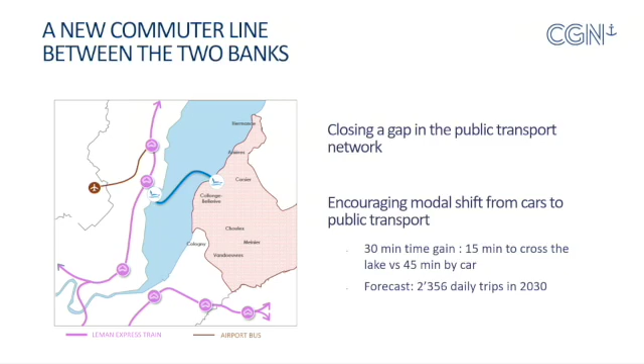So between the highway and the waterway, we want to convince people that they should choose the waterway because it's quicker and it's going to be more energy efficient as well. So you have some trips between this region here and this region here, where, for example, one of the largest private banks in Geneva is building a new headquarters, that are going to be 30 minutes shorter using boats as a means of transportation compared with using your car or the train all around the lake.

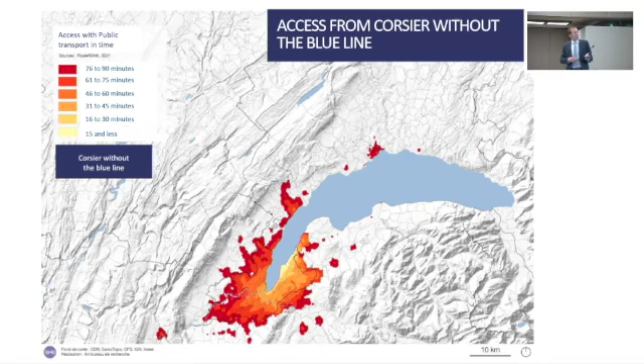So this is just to exemplify what I just said. Here is where the line would start. As you can see, we would expand the perspective, the places you can reach within the same time, significantly on this side of the lake, which is the side where a lot of economic activity is situated as well. So there is tremendous potential for people that have been using their cars every day to commute to work to shift to a public transportation means, which would be, in that case, the boat.

Why is it about decarbonization, you might ask? Because as I will explain afterwards, we will be using first traditional boats, so diesel-powered. It is, first of all, a carbon-free project in the end, because we are meaning it seriously when we say it's a zero-car project. There is no car access to the terminals. There is, of course, no car transport on the boats themselves. It's only accessible with a bike, on foot, or by public transport.

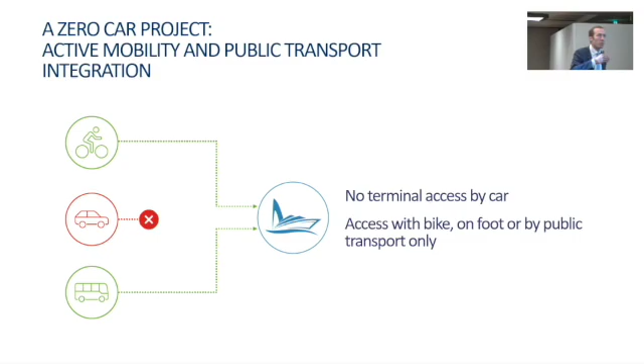So we are trying also there to not only act on our part of the transportation chain, but also to make people use public transportation or active mobility, sustainable mobility means, from the very beginning of the trip until the very end. And as we know in public mobility, this is decisive. Once people get into their car, they will never get out until they are at destination. But if you can prevent them from getting into the car and offer a better alternative, then it's going to be possible to bring them with public transportation or active mobility up to the destination.

With the boat, we also have a competitive advantage over trains and buses, for example, which is real estate on board is more accessible. It's easier to create large spaces, for example, for taking the bike on the boat, for taking the electrical scooter on the boat. You might have heard, all around the world, bus, train, streetcar companies are struggling with the questions of, can you allow people to take their bags with them? Can you allow every scooter to get on board with the passengers? It's very hard. It's a lot less hard on a boat where you have space, so you can create this chain of mobility. You use your bike, get on the boat, use your bike again, and you've been carbon free, or at least you've reduced your emissions all the way.

So we're taking here a two-step approach, and this is a full disclosure. We're not going carbon-free from the beginning because we can't. The capital expenditure would be too high. We are a publicly funded company, and it's sad, but it's true that today it's still kind of hard to convince public authorities that they have to come up with the capital expenditure up front before they can see the benefits. So we are trying to do decarbonation in that we are convincing people to switch from highway to waterway, and this is good because public transportation, even though the boat is diesel powered, is better than everyone being alone in his or her car. But of course, we know that in the second step we have to decarbonize the propulsion as well.

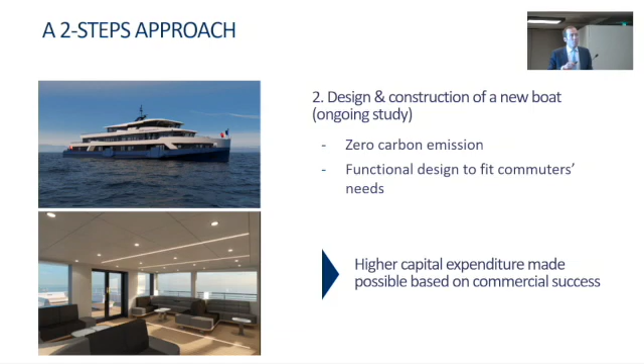So the second step would be clearly the design and construction of a new boat. That's why we are a proud partner of this conference here. We are sure there is a huge potential in public transportation on waterways, decarbonization too. And of course, we have kind of specific needs. It's very different from large shipping boats. It's very different from privately owned leisure boats. But we are certain that this higher capital expenditure will be made possible if we reach commercial success. It doesn't mean that we will be able to fund it all from the market, but we will unlock some of the possibilities to have external funding, because we will have proven that there is demand.

So we are trying to harvest something like a threefold potential in decarbonization, which is the big thing we are all talking about today. The first thing is demonstrating the potential of waterway commuting is a good thing, because we are encouraging through this public bodies and private actors to at least consider capital expenditure and opening new lines in this field. And this is always good, even though the boat isn't fully zero emission powered at the beginning, because you are gaining efficiency if you drive people away from the car into any kind of public mass transit.

So we are also working to increase the modal share of public transportation as a whole, because people will get on our boat with the bus, with the train. They will take the train on that side of the lake. The station is only a few meters away from where the boats will arrive.

So we want to offer something like a seamless and integrated experience. Taking the boat should not be something special. It should be integrated into your journey to work or back. And then we are also trying to encourage active mobility. We have special assets in this field, as I said before.

Bike transportation, scooter transportation is a very hard problem for most mass transit systems. It's not for us, because we can build boats with enough room to take the bike and the scooter with you. And this is very good to foster the potential of what's now called among experts active mobility, which is any kind of mobility assisted or not by an electrical engine, where you have to be active physically. So this is walking, of course, but also riding a bike or using your scooter.

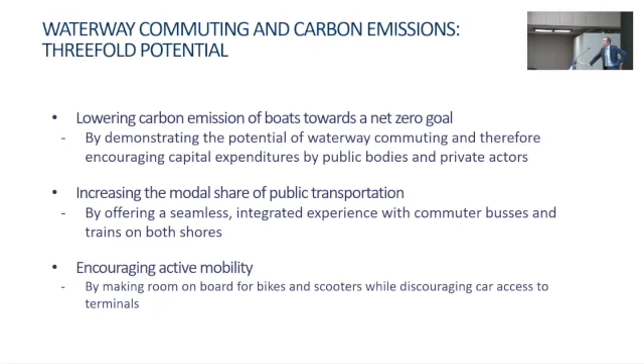So, okay, I hope you see that there is a lot to be seen and a lot of new markets to be opened, actually, that we then will have to decarbonize, so to speak. We are very proud to be a partner of this conference. For this reason, we are a very small player in this field, but would be very happy to foster innovation in Switzerland too. And that's maybe my last point.

Projects like this also help to open the horizon here in Switzerland, which is not a maritime country, which is not turned spontaneously towards the sea and shipping, at least not in the greater public. It's opening new fields of technological innovation that have made the success of Switzerland before to new propulsion systems on water. So I hope this has been enjoyable for you all.

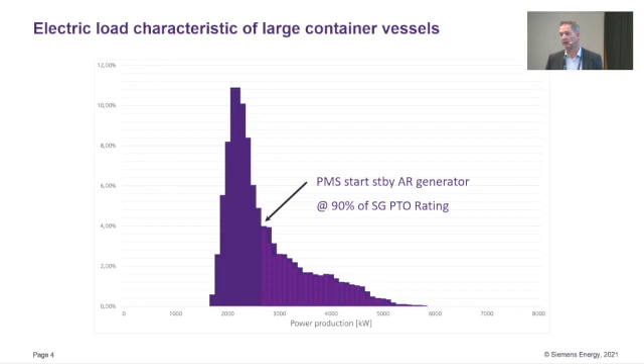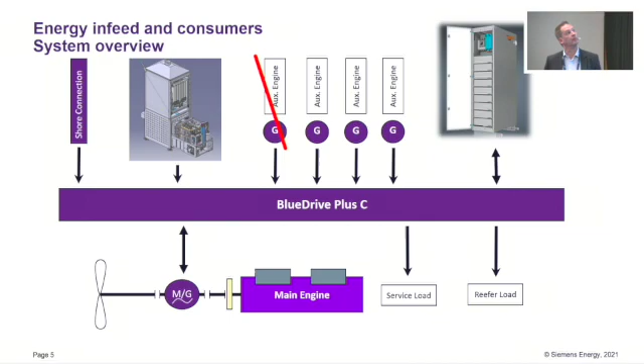Here in this case, you have your shaft generator driven by the two-stroke engine in so-called PTI/PTO, power take off, power take in. So you run it as a motor or generator. In motor mode, you can apply additional torque to the shaft line, and in generator mode, you feed your electric system. Shore connection is also quite easy to adapt to this solution. You are also frequency independent, so you can adapt to 50 or 60 hertz networks in the harbor. And alternatively, we now have the fuel cell solution also included in this system concept, which I'm coming to later.

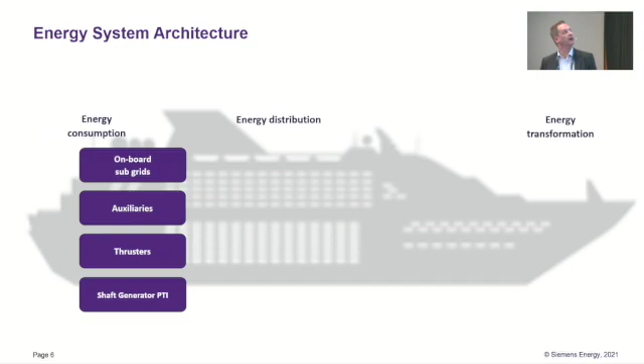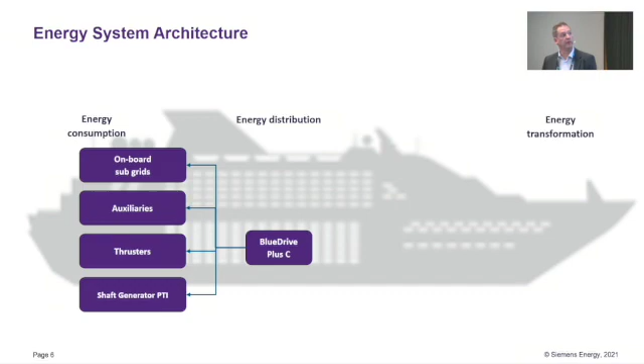So this is just showing an overview of the different consumers again. You have your subgrids, auxiliary supply, thruster, and shaft generator, PTI. The distribution network, Blue Drive Plus C, that's the energy distribution. Your energy sources will be variable speed gensets and the shaft generator, PTO, and you are able to connect batteries to this system, and alternatively also fuel cells. And the fuels are also discussed today. Here it's shown ammonia, LOHC, which is one fuel discussed for small ferries, and pure H2 as a fuel.

Of course for ammonia and LOHC, you have your reforming in between to operate these fuel cells, but the advantage is ammonia and methanol can be used for two-stroke engines and are on board already, so this fuel can also be used for emission-free operation in harbors using the fuel cell technology, adapted to the electric supply system.

So everything will be controlled by our energy management system and EcoMAIN Suite, all these energy delivering components like diesel engines, batteries, and fuel cells. The batteries' charging and discharging cycles will be controlled to operate them in the most efficient areas. Fuel cells, with partial load, operate at a better efficiency point. And in addition, your variable speed generators, depending on the load, work at different RPMs.

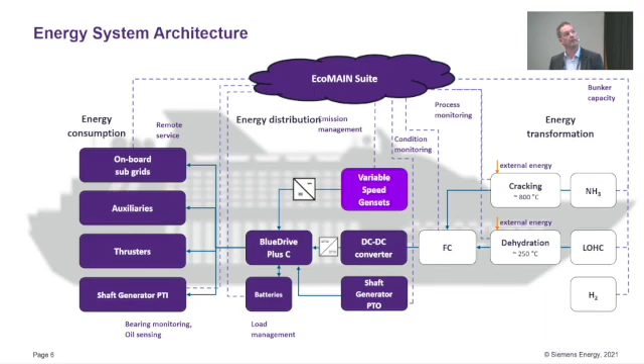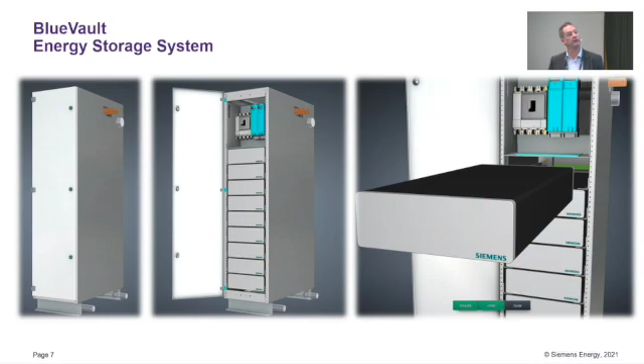And so we have about 40 references now for this system being integrated in this Blue Drive Plus C concept, mostly for ferries. The largest installation we have is 5 megawatts, and so this is already quite accepted in the market.

So one cabinet will be 200 kilowatt supply, and all the auxiliaries will be handled within the system, so air cleaning and some compressors for the hydrogen, so that can be then adapted to the electric network.

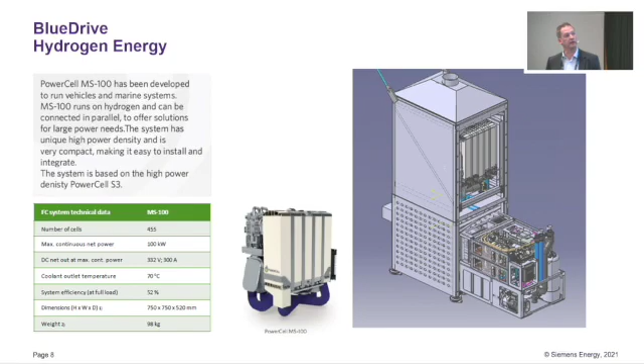So coming now, just an overview of the fuels which are discussed for the fuel cells at the moment. Compressed hydrogen: I'm involved in a project to decarbonize the shipping of the Rhine area in Germany. So there, compressed hydrogen is the preferred fuel. They're talking about containerized solutions to bring this on board. It's a concept which is discussed at the moment.

Liquid hydrogen, we are talking also to MAN Cryo in this sense. They have tanks available for a fixed installation on board. So that is also a possibility there. LOHC can be stored in your normal bunker tanks. There are no requirements. And methanol and ammonia. For methanol, the tank structure can also be used on your ships. So this is, I think, the advantage of these fuels.

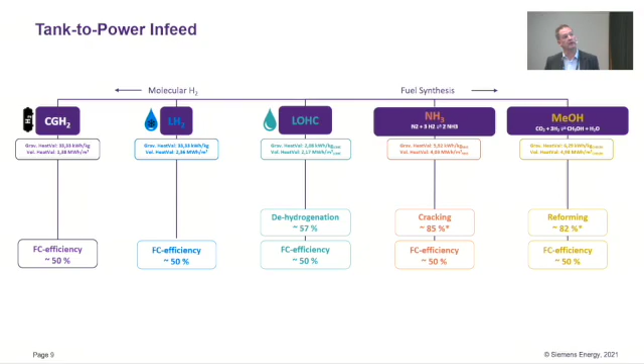So the fuel cell efficiency is shown here at about 50%. But then for the synthetic fuels, you have also the reforming process here, which of course takes some efficiency off. As discussed also today, the first ships will operate on methanol in the future. So there would be an option also to use fuel cells for emission-free operation of container ships in the future in a harbor area or emission-free areas.

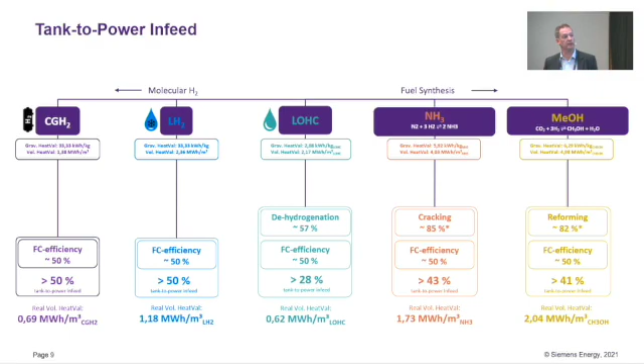So this is showing the energy density again. What we do also with the customer is having a look at the CAPEX and OPEX. The present situation, I must admit, is a bit difficult. But I think as soon as this is widely used in the market, of course the price will come down.

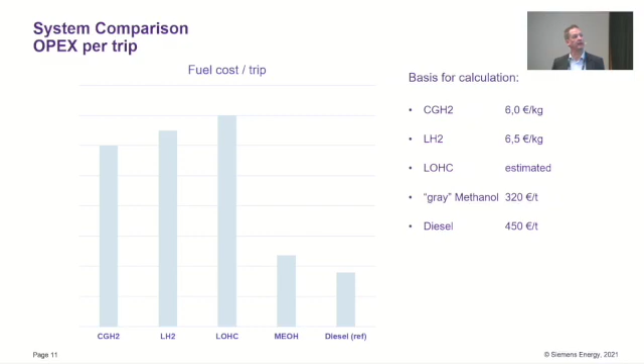And the OPEX, I think there will be significant changes in the future. So at the moment, using synthetic fuels or pure hydrogen on the ship is approximately a factor of 3 compared to diesel. But with the introduction or the rise of CO2 tax, this will increase probably, and hopefully the hydrogen price will come down and make it more attractive to invest in these technologies.

Okay, coming back to the questions, I think that was discussed also in the panel before. The discussions we have with the ship owners are really that the fuel and the infrastructure need to be there before they do the investment. That will be the basis to bring these technologies with fuel cells forward. But the basic message is that the technology is there, and so it needs to be made attractive for the ship owners through funding or something.

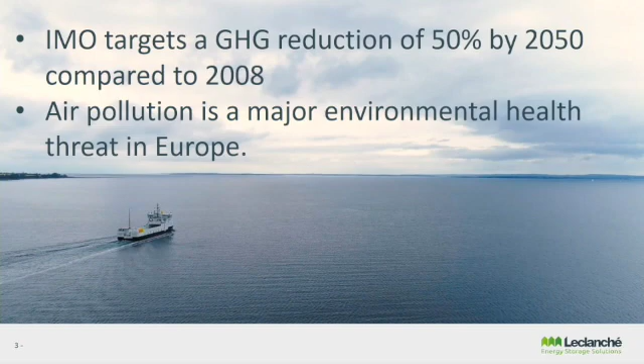Let's get to the presentation. You have heard a lot this morning as well in the agenda that there is an ambitious target to reduce greenhouse gas emissions by 50% by the year 2050 compared to 2008. And if you compare to the 1990s level, it's pretty much reducing by 100%. So there is a tall order in front of us just on greenhouse gas emissions, but oftentimes people forget that there are other aspects of pollution, NOx, SOx. Air pollution is a major cause of, unfortunately, death around the world, especially in busy cities around the port. So one of the key solutions to get to this target, not the only one, would be to use electrification energy storage systems to go towards zero emissions.

Look at this. Here is the experience of Leclanché on a few of the slides. Here is a project we have just delivered to our customer in Finland. This is the impact of using an LNG battery hybrid. The numbers compare a diesel ferry in 2018 versus what will be achieved by this Wasaline ferry, which we have powered 100% with our batteries. The numbers speak for themselves. They are compelling. The point we would like to make with these examples is that we don't need to wait for the world to change in 2030 or 2050. The world can be changed today progressively. We need to get there.

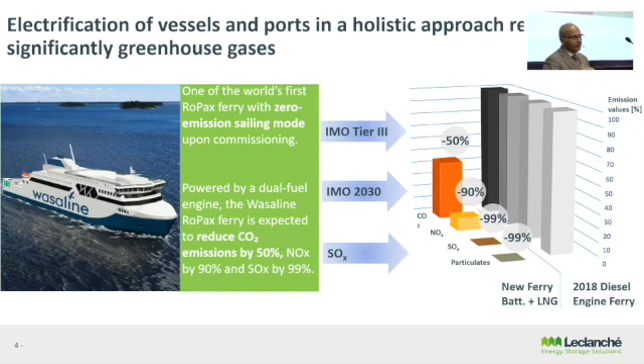Oftentimes, I've been asked the question, is electrification nice to have, green painting, greenwashing, or is it commercially viable? The answer is, it is commercially viable. Our customer is here. He will speak more about this project than we do, Ellen Electric Ferry, but the numbers speak for themselves, not only on the targets we achieve on greenhouse gas emission reduction, but also the economic part of it. The graph to your right has 3 different colors.

It may not be obvious to you. It says all diesel, or diesel and battery hybrid, or all electric. Okay, for the all electric implementation, we have done it for the customer Ellen Ferry in Denmark. You'll hear more about the project from the panel. The payback period, officially informed by the customer, is between 4.5 years to 5.5 years. How long is the ferry designed for? You know it. So it is economically viable.

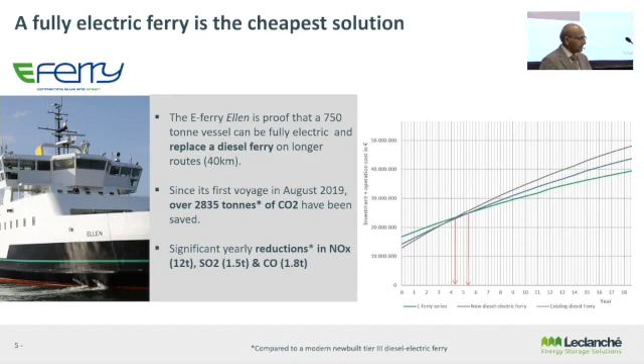Those were the 2 quick examples to show why we should embark on electrification today, not wait for the great battery technology to come in 2030 and then start electrification. The technology today is good enough to start in a very competitive, economically viable case. And we say that on the basis of the number of implementations we have done around the world, and these are a few examples of it.

I don't know how to work this. Yeah, it works. Okay.

So this is the project we've just talked about. I'll skip the details because there's an expert here. Let's just talk about a few other things we did. For Grimaldi, this is a diesel and battery hybrid. Can you imagine the size of the battery? It is 5 megawatt hours of batteries, and it is hybrid. 5 megawatt hours of batteries. These are large batteries.

We, along with our partner Kongsberg Maritime, created this mode in our architecture called zero emissions in port. So if you look at Grimaldi's vessels operating between Italy and Spain, particularly going to Barcelona, you'll see these beautiful Grimaldis going. When they pull closer to Barcelona, all electric, completely silent, zero pollution. That's in operation today. We have delivered 7 of them. 5 of them are in operation as we speak.

And as a result of that, we need to look at where energy comes from. Where is it? It's not something we make, it's something that exists. It's something that we can extract and use to make power. And how do we do that? We've got the light elements and the heavy elements in general as a sort of 2-factor part of this. In the light elements, the hydrogen end of everything, effectively what we're always going to do is to do more to get less. And on the heavier side of the elements, we can do less and get more. And hence the reemergence of atomic or nuclear as part of the debate about future energy systems.

Now, I want to be absolutely clear with you that one of the things that we've been spending most of our time doing for the last 5 years is to drive a wedge between conventional nuclear as you know it, or as you think you know it, and advanced atomic as is being developed.

One of the observations that I've made in my 30 years in shipping is that we find ourselves in a real funk. And the funk isn't so much what solution should we pick in order to keep on doing what we're doing. The funk is really, what do we need to understand to make a change? And if we look at it from a very specific point of view, it's a little bit different than what most people do, but it's an interesting way of looking at it. We've got approximately 100,000 vessels on the water. That is everything from 100 gross registered ton up. So it's small, right?

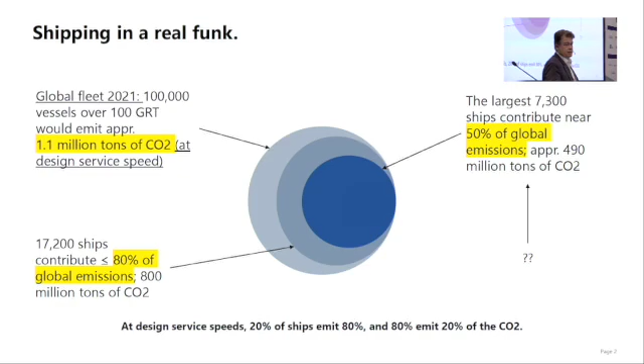Of those, 7,300 of those 100,000 ships emit just shy of 50% of all the emissions. They consume about 50% of the fuels and 50% of the emissions that are made. 7,300 ships, that's 7.3% of all the ships out there. 17,200 ships, so we're just adding an extra 10,000 ships, and we're at 80%. 80% of emissions from this industry comes from 20% of the ships in the fleet. And conversely, 80% of the fleet makes 20% of the emissions.

So in terms of looking at zero, there are many ways we call it zero. We call it net zero, we call it all sorts of different types of zero. We're talking about zero emissions as if, if we don't emit carbon, it's zero emissions. That's not true. If you're combusting, you're emitting. There's always some emission from a combustion process. You can't get away from it. It's the law of nature. So I think what we have is net zero and we have true zero. True zero is when there are no emissions at all.

And if we look at this particular funk that we're in, and we say, if we're going to reduce the emissions from this industry by 50%, why don't we look at the fleet that emits 50% of the emissions? That's 7,300 ships. It's not actually that many ships, but they're awfully large. The largest container ships, bulk carriers, tankers, gas carriers, cruise ships, etc. If we can find a way for them to be self-powered, give them their propulsion means in an electric world without having to use shore power, without having some source somewhere else that powers these ships, we can reduce that 50% from the fleet. And it's not actually that hard. But then we're left with the rest. That's 80% of all those other ships, which is 20% of the emissions.

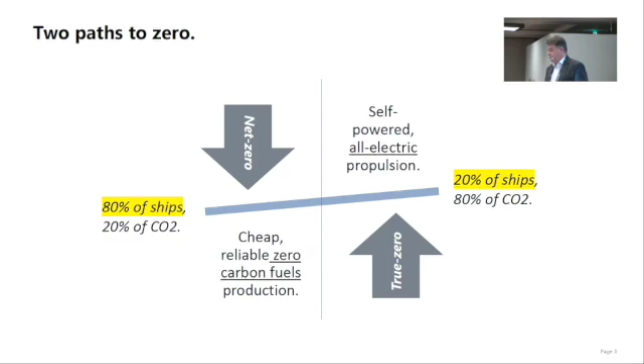So we've got two sort of paths to go forward here, and we have to be certain that we understand how to do it. The one thing that struck me about 5 years ago, actually it struck me a little bit earlier, was that if we are going to be faced with a never-ending series of regulations that aim to strangle emissions from this industry, we're going to drive ourselves into a ditch. We need to have something that gets us out of that. And the only thing that we actually need is resilience. We need energy that we can rely on, not energy that's intermittent or only available when it's there. We need it all the time. So resilience is the one thing.

And we can only get that from two places. We can get it from fossil fuels, which is what we've got today, which is what's powered the industrial revolution we're in, or we can get it from atomic, from nuclear. But then we need to think nuclear again. We need to think about it in a different way, because what we have at the moment isn't fit for purpose in our industry. Yes, the navies operate on reactors. Yes, there are Russian icebreakers that operate with reactors. And there are certain examples from the past of reactor technology that has done pretty extraordinary things. But it hasn't really been fit for purpose, and it hasn't really taken off because of that reason. It's been uneconomical. It's posed a proliferation risk. It's been politically difficult. It's just been too hard.

So new energy technology is what we're looking for. And what we've done is really look at this from shipping's point of view, not from nuclear's point of view. This is not the guys developing fantastic new technologies looking for a market where it can be deployed. It is our market looking at what we need and what that technology should look like. So we've been through, and you might want to take a note of this, all of the various potential designs that you can have of a nuclear reactor, and the number is 984. There are 984 different types of nuclear reactors possible in theory, but you can lump them together into categories, and you can discard certain categories because they're not fit for purpose.

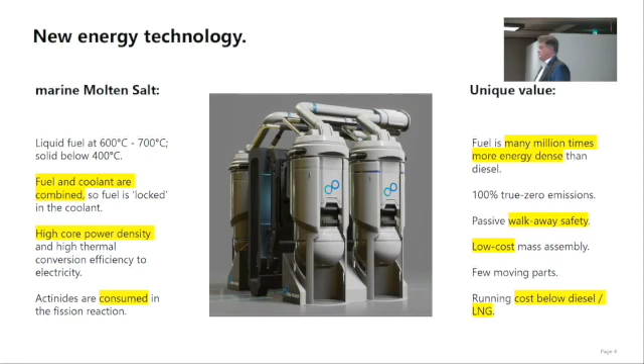And that liquid fuel, of course, can't melt down. And that liquid fuel means that you have got the coolant and the fuel combined into one. So you can't lose the coolant, and you can't have a reactor accident like we've heard about from Russia, the Ukraine, Japan, etc. So really what we've got here is a new way of looking at nuclear, a new way of developing a technology that we can use for shipping.

Now, why did we pick the molten salt reactor? Well, these criteria that we set for the industry are the 3 things we need to solve. And the 3 things we need to solve are that extremely difficult political challenge of proliferation. What if the material falls into the wrong hands? What if we end up with nuclear material going astray somewhere in the world? And we can solve that if we look at the problem in a particular way.

The second one was we need to be able to make sure that this isn't just safe, it's passively safe. So if there's no one left on board to actually handle the system in the event of an accident or a disaster at sea, and we know it happens, then it shuts itself down. It's passively walk away safe. It's like if I had an on button and I pressed it in, and if I wasn't there to press that on button in, the system wouldn't work, like a dead man's switch.

And the last thing we need, of course, is something that is small. It's like all technology. Look at locomotives, computers and telephones, things that started off much larger and now become smaller and smaller. Engines become smaller and more efficient. We need something that's small, something we can mass produce, mass assemble, at very high quality standards, and as a result do it more economically than by constantly prototyping large machines.

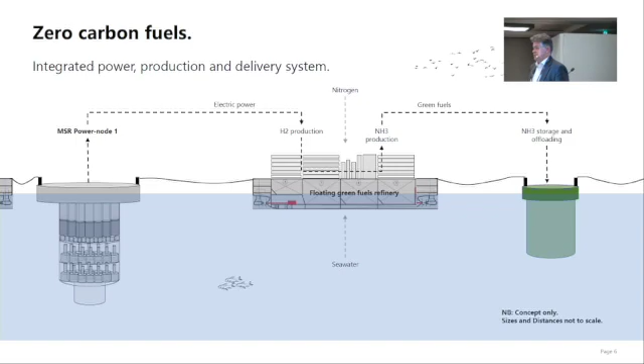The other thing we can do is we can put them on ships and actually power ships with them. But because these are powerful machines, we don't really put them on small ships tramping around the world. We're looking at those 7,300 largest ships, container lines, that operate huge ships going from point to point on a regular service. Bulk carriers doing iron ore transportation from terminal to terminal, tankers, gas tankers, cruise ships, etc. That need awesome amounts of power that they can rely on and that don't have that ability to pollute the environment.

That's 30 years. Effectively, what it means is that the fuel load in the reactors on board this electrical system on board the ship enables her to do 5.2 million nautical miles on a single fuel load, emitting nothing. And she does it faster, she does it for longer, and she does more as she does this.

It's actually competitive to go around the Cape from the east into Europe with the Northern Sea route. It's the same sailing distance at that speed as the Northern Sea route. It starts to compete with the trains that are moving from Asia to Europe. This is the competitive advantage that we need from new technology. If we start to use lower energy dense materials to create an energy future for ourselves, we're just going to spin, I think, on the spot, and we end up paying more for less. Here you get more for less.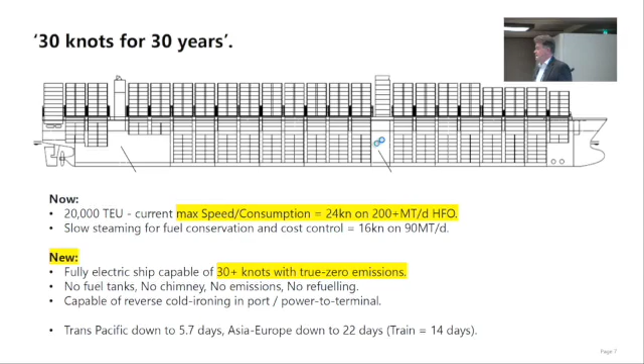So now you're decarbonizing the port, running the gantry cranes, the pumps, the loaders and dischargers, plus of course all the port infrastructure that's there, from the electric power of the ship. And in some of these trades, like in iron ore transportation, nothing really happens in the iron ore loading terminal or discharging terminal unless there's a ship at berth. So you have that ability to start spreading the decarbonization further up the chain.

This is really a hybrid electric drive system. So the way this functions is completely different to the way they use it in the Navy, which is a steam cycle. You have reactor, steam cycle, shaft line, and then propeller. Here you have a complete separation of the two.

This is heat created, 650 to 700 degrees at very high megawatts, converted into electric power by a power conversion system using turbine technology. It could be steam, could be gas, could be some of the new systems that are coming. And then you have an electric drive system. Because you don't have long shaft lines from the engines, you can now move towards twin screw, triple screw, combinations of propulsion systems that give you the highest efficiency.

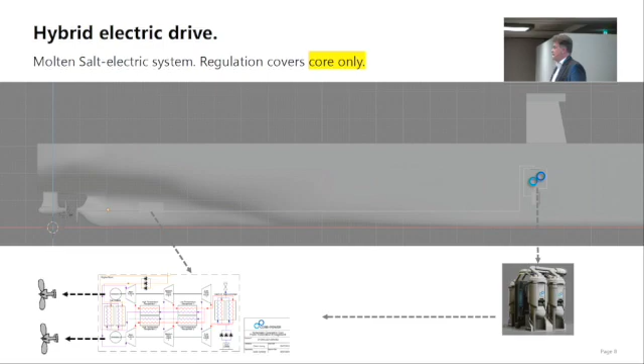This adds to the ability to maintain that high speed. It also changes the way that this is regulated. If you're regulating only the nuclear part rather than the entire system, it becomes rather a lot easier for regulators to deal with.

The elephant in the room, the question that always comes up: what happens in the case of an accident? What happens in the case of the waste at the end of this process? So I'm going to address that elephant, and I'm going to show you what really happens here. And the reason why we've chosen this particular reactor design is partly because it does so well in these cases.

In a marine accident, we have to remember that, as it is today, a nuclear accident anywhere is a nuclear accident everywhere. Something happens on the other side of the world and everyone takes cover. It's this irrational fear of radiation that is part of the natural world we have to study and understand and get over. We need to relearn this stuff. But it does really well in this case, because what happens in the case of a marine accident? Let's say that there is a gas explosion on the ship, it breaks up and starts to sink.

Well, you've got, first of all, the molten salt reactor, which is a non-pressurized machine. It doesn't have the ability to expel radiotoxins into the environment. It sits inside a very powerful vessel, inside a shielded compartment deep inside the vessel. It's what we call a Coke can in a cathedral concept. There are huge crumple zones around this, and no manner of force applied to the ship will actually enable the leak of fuel from the reactor. That's a key thing, right? There's no leak that comes from it.

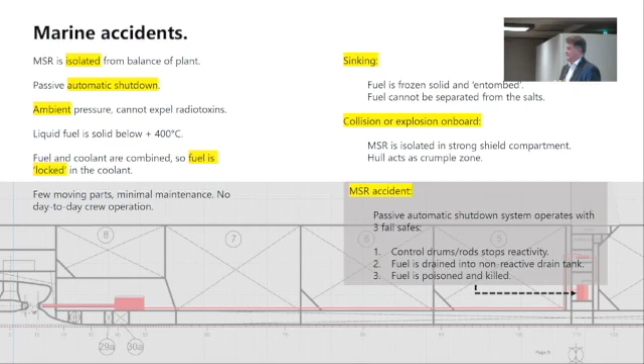In terms of an accident regarding the reactor, say we have a reactor accident, we have passive fail-safes that kick in, that no operator can override. The first thing that happens is that the control system in the reactor, which is held in place by springs, if that spring system fails or if anything fails around it, they automatically close. That stops the criticality of the machine, and it stops generating power. Then the fuel is drained into a separate set of cavities where, again, it cannot have any power effect. And eventually, if the ship is going to go down at, say, 8,000 meters and we can never see her again, we'll poison that fuel, it'll be killed, it can never be used for anything ever again.

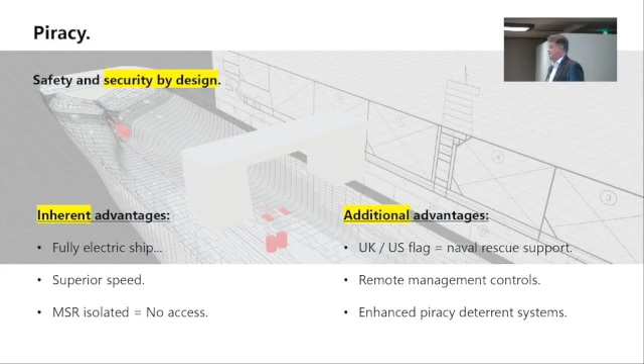Piracy. Well, we have some really great advantages. Remember, this is a fully electric ship. A fully electric ship means we have things we can do against piracy. We have superior speed, and it's completely isolated from access. No one has access to the particular reactors on this. Additionally, by flagging these in the correct administration, UK, US initially, we're also under the protection of those navies. Remote control: with our electric ships, we can start to form the platform for new generations of autonomous vessel systems.

Lastly, I'm just going to talk very quickly, 30 seconds left, waste management. People say, but what about the waste? Yes, what about the waste? But actually, the waste part of this is the selling point. It doesn't add to the problem.

We heard earlier on about the waste of batteries. Remember, we've got an industry here that releases 1 billion tons of CO2 per year into the atmosphere. Don't forget, 10% of that billion tons of CO2 in the atmosphere is still going to be with us in 120,000 years. It doesn't disappear quickly. No matter what we do today, it's still going to be with us in 120,000 years.

The nice thing about these molten salt reactors is that the fuel efficiency is so superior that we're actually generating very little waste. And what we haven't used in 30 years, we recycle and reuse in the next generation of reactors. So sustainability starts to kick in where we're not mining for new material each time. We simply top up that 4% that we've used, and it goes on. Next generation. Remember, the salt is impervious to damage from radiation. It continues to work from generation to generation. So we're recycling that final waste, and we can actually take certain things out of that as well.

Let me give you an example, just as a final, leave you with this thought, okay? A Cape-sized bulk carrier doing iron ore transportation for 25 years. She sails from Tubarão in Brazil to Qingdao in China, or even in Japan, and she does this at her absolute maximum design service speed. And let's say that with a little bit extra, she can do 16 knots rather than 14 knots. She will use 170 kilos of fuel in 25 years. That is also the total amount of waste after 25 years.

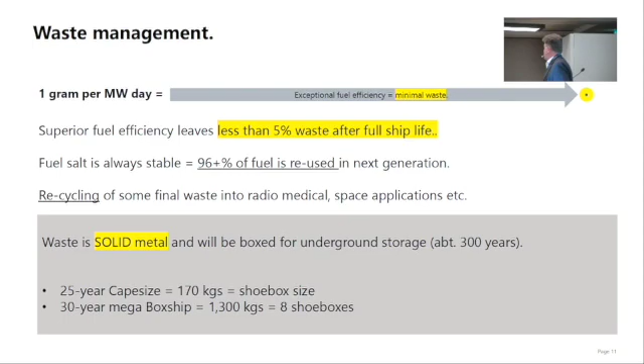I think this is something that, hopefully after today, you will go back and you think, actually, this is worth thinking about. Try to unlearn what you think you know about nuclear. Look into it and see what the potential is here. The dangers are perceived, but the reality is actually one that we can move forward with.

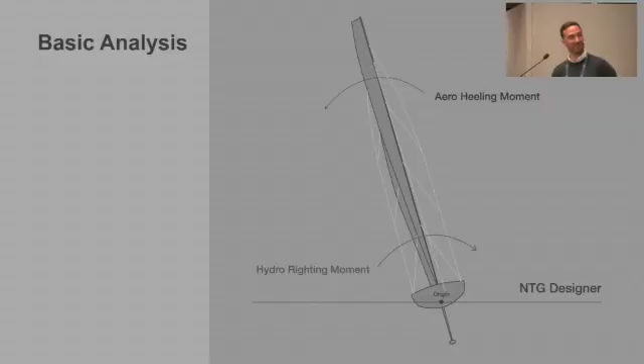So moving on. What is our approach to satisfying those requirements? Our process is always evolving and improving. We've been looking at sailing yachts long since you guys typically gave up on it. But not so long ago, we were still using a relatively simplified approach, where each element of the whole boat was designed somewhat in isolation. What I'm illustrating over here is the boat designer would typically specify to us the righting moment of the vessel, and then we would design the rig and sails to just handle those forces.

Alternatively, another simple approach, which I'm seeing now talking to people in the commercial industry, is someone specifying the max wind speed that they want to operate in, and then we would use the same approach, see the forces that are generated and make sure that the rig is going to handle that. It's fine, you get a pretty good idea of the peak loads that the whole vessel will see. But it doesn't give you the whole story.

It doesn't show you how often you're seeing the loads, what conditions you're going to be seeing them in, how the sails are trimmed at that point, and particularly how all the forces are balanced together. Often there's a disconnect. Even if there's a max wind speed specified, are you going to exceed other operational limits, like, for example, the heel?

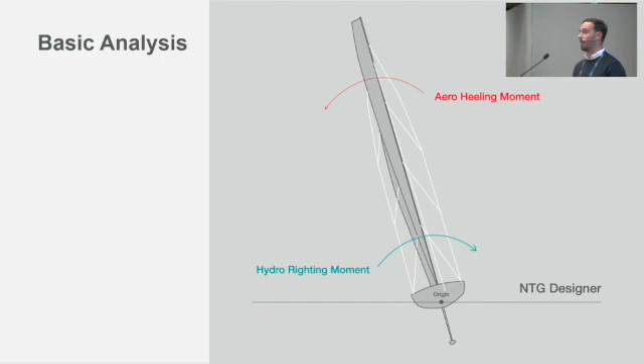So that's where we look to balance the forces. This is nothing new to anyone in shipping or in ship design. It's no light bulb moment here. But what has often not needed to be dealt with in so much detail is these large lateral forces. With a simple screw propulsion system, it's quite easy to keep the boat going in a straight line.

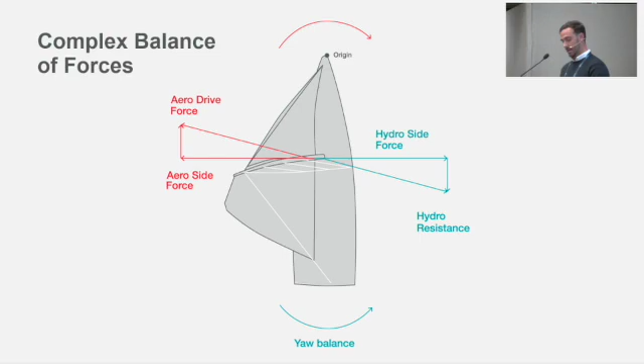Whereas with a significant wind propulsion unit, you could end up with the incorrect positioning of that on deck. You might end up with a relatively large yaw moment, creating leeway angle, or extreme rudder angles just to keep it going in a straight line, which we know is creating significant, dramatic increases in hull resistance. So you do need to get it right. Of course, more work is needed on the hydro side to understand exactly where the limits are and where you're going to break even. That's not really what we're looking at today.

Obviously, once we have the aerodynamics and the hydrodynamics, this can then be inputted into a velocity performance prediction package. I'm sure all the yacht and ship designers have their own packages. Ours, developed in-house through years of competition, is highly effective at looking at the aero package and finding the optimum sail trims. What we're looking at here is a simulation we had run on the Black Pearl, one of the DynaRigged superyachts out there.

You have the wind conditions in the bottom, true wind speed, apparent wind speed, and angles, the rotation of each of the sails to get the optimal performance, and the resulting rudder angles, heel angle, leeway, and of course the speed. This gives you tangible results that you can put your hands on, time from port to port, liters of fuel saved. This is then obviously the best way to assess any changes to the platform, to get the most out of it and make the right decisions.

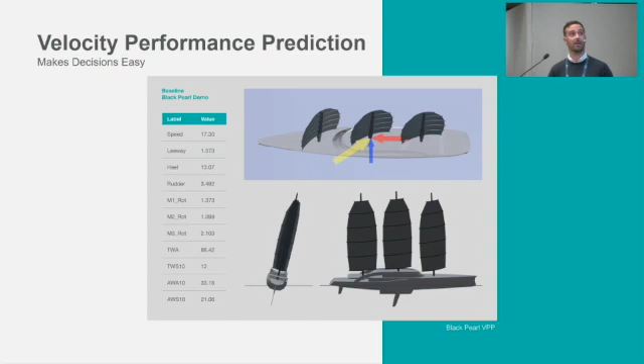As the aero package becomes more significant and you're looking for more liters of fuel saved, the more reason there is to look at project-specific aero analysis. You can't, at that point, be relying on generic databases. And that's where I think we have probably the most value to add into this design loop.

North Sails, the experts in aerodynamics, we've developed over many years what we like to call our virtual wind tunnel. And that's not just complex codes like what we're showing here. This is a snip from a RANS simulation. If that name's not familiar, basically it means a complex simulation that's going to take a long time to run and cost a lot of money. But we also have an array of other code solutions that are a lot simpler and more efficient, and when used in the right application can give you just as good an answer. The key is knowing when and where you can make that differentiation.

As I said, we don't claim to be hull designers, and there's definitely a lot of work to be done on how to integrate an aero package like this into a hull shape. But just as much, the aero side of this analysis is quite complex. Boundary layer onset flow resulting in twisted apparent wind angles onto the sail plan, the myriad of trim options on how we're going to get the best out of the platform, and of course the interaction that one mast will have on the other. This is where our experience is strong.

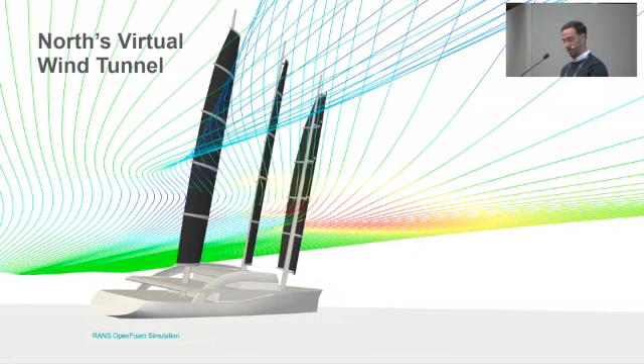Then, having done that full performance prediction, having run the aero analysis in full detail, we have a very clear picture of what's going on in the sail plan. To get even better again, you would look at the fluid structure interaction, looking at the deflections that the forces from the sails create on the structure, and then how that loops back into the performance. The angle of attack of the sail plan might change in that instance.

So we go through that design loop within our design process. That's a very efficient and well thought through action to get the answers that we are looking for, to get the peak performance. As I said, coupling that with the hydro, you then have the full picture. You can really hone in exactly on what the critical load cases are for the structure, and not looking at necessarily ones that are physically improbable.

I mean, we know for a conservative industry like commercial shipping, they expect the answers to be right first time, and doing this in-depth analysis is the best chance we have to get there.

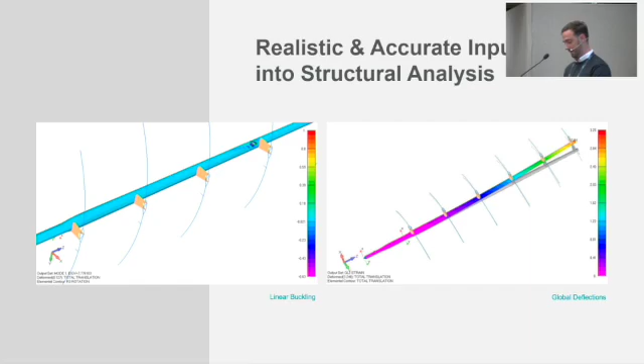We of course still need to differentiate between normal versus extreme conditions. I mean, normal sailing may, for some vessels, need to be done in extreme conditions or what we would consider extreme weather conditions. But what I'm talking about here is the difference between operational conditions where the sails are going to need to be adjusted in and out continually to get the most out of the platform versus kind of a survival condition where you just expect the sail plan to be easing or depowering.

And that differentiation can be very significant on the specification of the componentry that would go into this type of setup, where it just needs to be strong enough but doesn't need to be able to pull that load on. That can have a massive impact on the cost of that componentry. Again, having the clear picture we're able to then make that differentiation.

And finally, being able to make the link between the conditions that the vessel is in to the optimal performance that we'll need to deliver on the promises made by the supplier, as well as then the structural loads that the rig will be seeing. Here we have an example from the Maltese Falcon dashboard. This was commissioned in 2006, so 15-year-old technology, where the masts had fiber optics running up the length, being able to assess exactly what the strains were and have clear communication back to the crew when you were at a level that was getting a little bit on the upper end of the operational envelope.

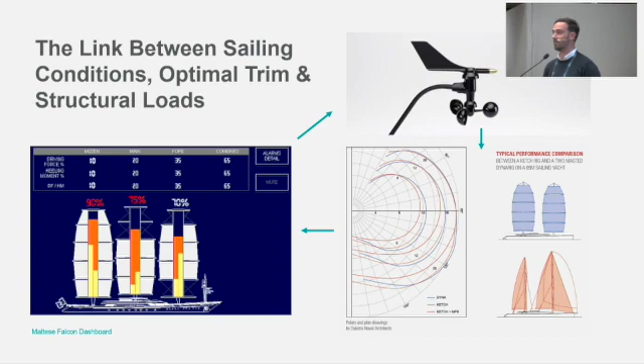Thank you very much, Dale. Very, very interesting. It's really interesting because I spent my whole professional career working with cargo ships and seeing these ships in port, just these big, big, blocky things. And then seeing some of the images you have there, certainly the video, it's quite inspiring.

Do we have any questions from the audience after that presentation? Do we have anything they're curious about at all? I think you did an excellent job of explaining it. And so thank you very much. Thank you. Please. I'll call you up. I'll wait for him, just wait 2 seconds.

So now we're getting on to the end of the day, and we just have one final panel discussion or fireside chat as it's been described. This is quite an interesting discussion because it's talking with two giants of the industry. We will be talking with MSC and also with Shell about their views on decarbonisation and also where they see that we're going and what they're doing together in partnership. So if you could please join me in a very, very warm welcome to the stage for Bud and Melissa from MSC and Shell, please.